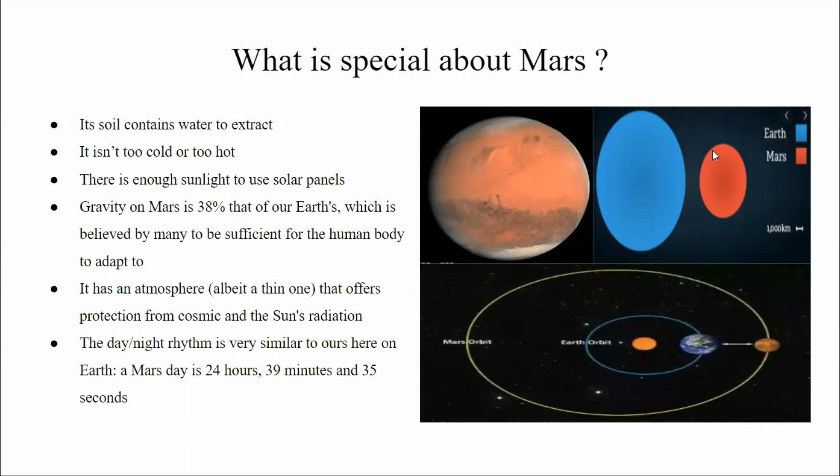Now let's see what we will need for colonization, not only on Mars but on any other planet, or colonization in general. Ask yourself what things you need daily to continue your life. You need basic utilities, you need food, you need communication. Mars is an interplanetary colonization, so you need interplanetary transport. You need transport on Mars like rovers or something else. The problem that comes here is all of this requires power.

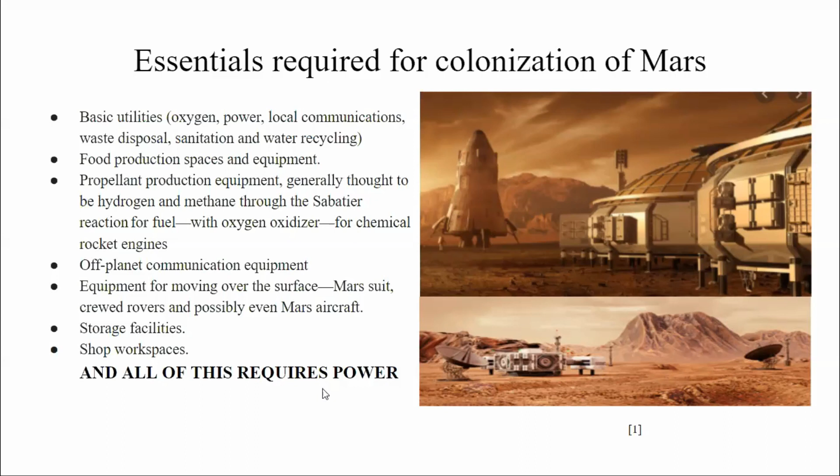If we want to colonize Mars so that it can back up all of our needs, for power generation on Mars we are proposing a supercritical Brayton cycle that will be operating on supercritical carbon dioxide as the operating fluid. Now, why a supercritical Brayton cycle and not any other normal cycle like the Rankine cycle or air Brayton cycle? The thing is, the sizes of these cycles have been very huge.

The Rankine cycle and the supercritical Brayton cycle are both designed for the same amount of energy generated. So you see, for 300 megawatts of power, you need about a 20 meter span of steam turbine, whereas the same power requires just a 1 meter span of supercritical carbon dioxide turbine. Moreover, the efficiency of supercritical carbon dioxide, as you can see, surpasses 40%. That is the highest achievable efficiency of any thermodynamic cycle till now.

Moreover, the system gets compact because the density of supercritical fluids is higher than that of gases. So it makes the machinery compact. Now let's see why we are going to adopt the supercritical Brayton cycle on Mars. The key here is the operating atmosphere, consisting of about 95% carbon dioxide. You can see here we have carbon dioxide as our operating fluid, not any other gas.

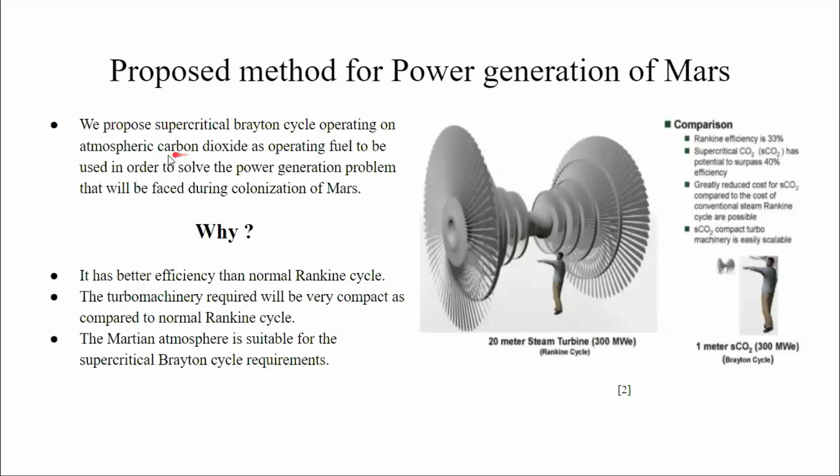We can just inhale the atmospheric carbon dioxide from Mars, compress it to its supercritical form using a compressor, and after that use it for expansion in a turbine; in between, we can apply heat using different methods. In our study, we took a nuclear reactor for heat exchanger applications. The only problem with the Martian atmosphere is it is much thinner compared to Earth's atmosphere. On a normal day, the pressure on Earth is 1 bar and on Mars is 0.006 bar. So there is a huge difference between the pressures.

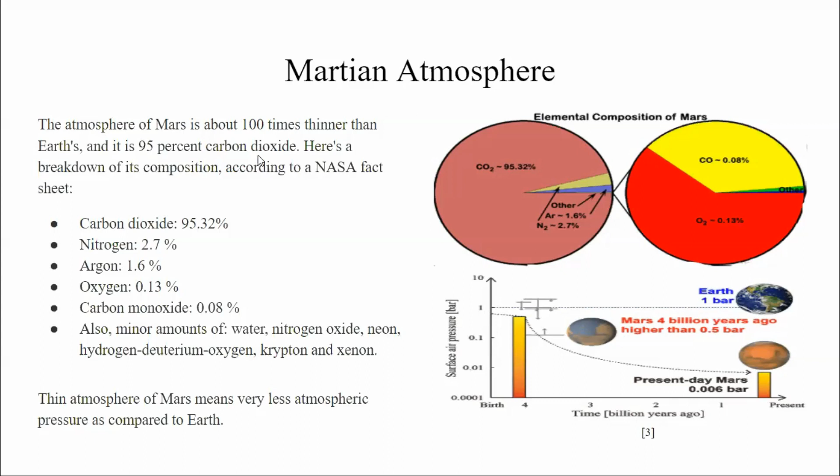So what are our objectives? So far, I think it is clear that we are going to make a power generation cycle on Mars to make it habitable. We are going to use atmospheric carbon dioxide, and we are applying the principle of the supercritical Brayton cycle attached to a nuclear fission reactor which will provide enough heat. In simple terms, we are going to design a power plant in accordance with the Martian atmosphere.

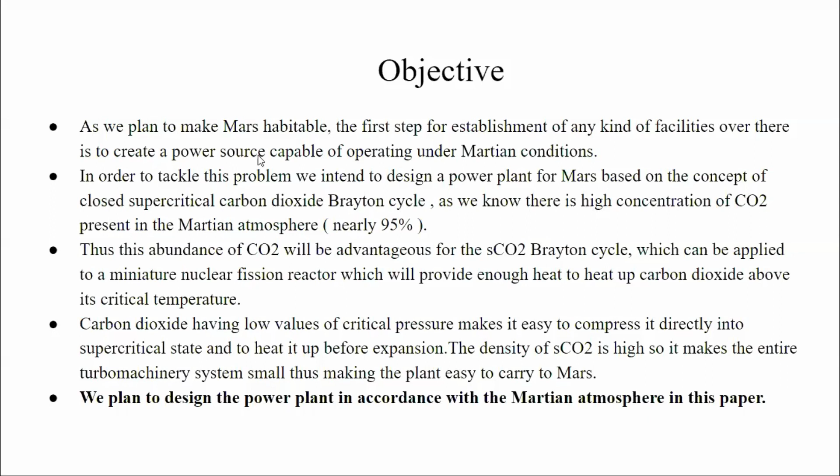So, what is the concept behind the idea, behind the supercritical Brayton cycle? The basic concept is to do in situ power generation. You must have heard these days that SpaceX is planning to generate methane on Mars from carbon dioxide. That type of generation is called in situ generation. That means you are using the resources of that planet itself without carrying anything extra from here. So we are conceptualizing that we will use atmospheric CO2 on Mars for our operation.

See, this is the temperature versus specific entropy graph of the supercritical carbon dioxide Brayton cycle, and this below is the vapor dome of supercritical carbon dioxide. So you see that carbon dioxide critical pressure is about 7.7 megapascal. That's very low as compared to other fluids that we have; the supercritical pressure and temperature of carbon dioxide is very, very low.

So what we plan to do, we plan to inhale atmospheric carbon dioxide from our compressor. Then we plan to compress it to about 7.7 megapascals. And after that, we plan to add heat from our nuclear fission reactor. And after that, we plan to expand it slowly on our turbine. And there will be a shaft that will be rotating and that will be connected to our generator. And in that way, our generator will finally convert the mechanical energy to electrical energy.

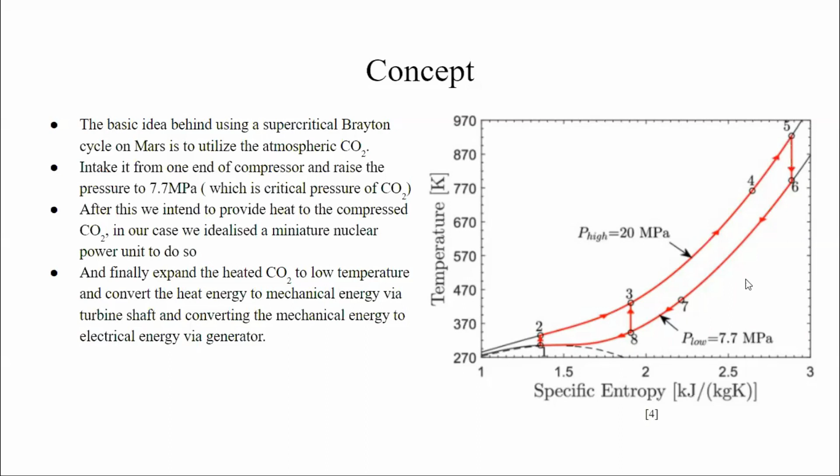The heat energy of the reactor is converted to mechanical energy by the turbine, and finally the mechanical energy of the turbine is converted to electrical energy with the help of a generator. So it sounds easy, right? But what are the challenges that we are going to face?

See, the first challenge is it's an interplanetary task, so we need to install all this system on Mars. Second, we need a nuclear reactor small and capable enough that it could be transported to Mars without any hazards, of course. The next and the biggest problem is this one. We have to increase atmospheric carbon dioxide pressure from 6 millibars to 7.7 megapascals. Now, how are we going to do that?

For initiating our calculation process, we have to idealize something, we have to assume some things. So what have we assumed here? We have assumed that we are capable of transporting large bulks of machinery that will be required for this task to Mars. Then we have idealized that we have successfully made a miniature nuclear reactor, and we are able to manufacture compressors of high enough compression ratios to pressurize carbon dioxide to its critical pressure.

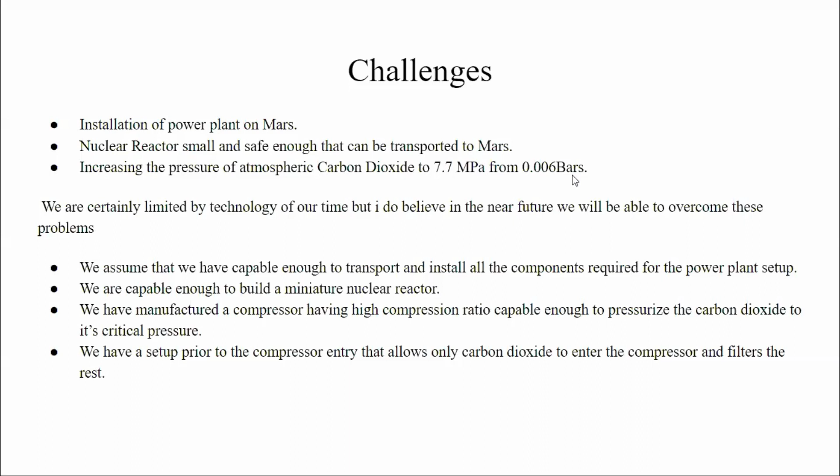Now let's see what supercritical carbon dioxide actually is. So any known element has three phases: solid, liquid, and gas. This is the curve of pressure and temperature. Above this, the element is in its solid phase. Between these, the element is in liquid phase, and below this, the element is in gaseous phase. This is the triple point of any element, at which its vapor, liquid, and solid forms coexist together.

Now, what is a supercritical phase of any element? When the temperature and pressure exceed the critical temperature and critical pressure. What's critical temperature? Critical temperature is the temperature after which, no matter how high pressure you apply, the phase of that element won't change. It won't liquefy anymore. So the supercritical zone is a mixture of gaseous phase and liquid phase. It has properties of both gases as well as liquids.

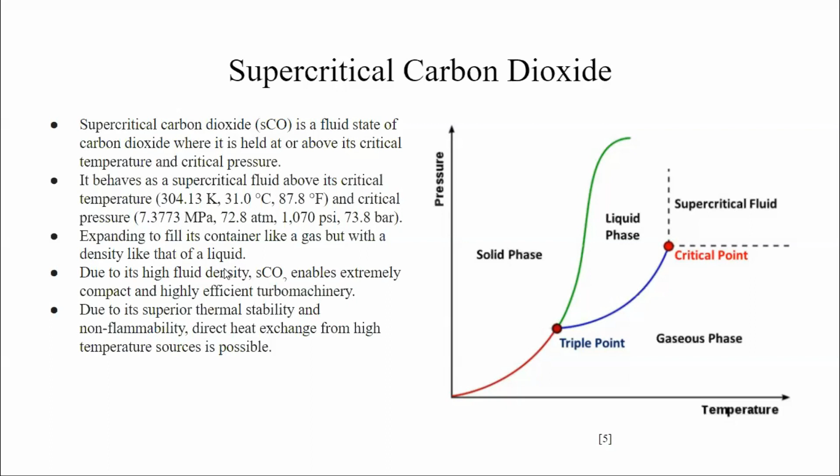So you see here that carbon dioxide reaches supercritical form very quickly. Right? We have to input very little work as compared to other fluids to make it reach its supercritical phase. So at supercritical phase, carbon dioxide has the following properties. It has low viscosity like a gas, high diffusivity like a gas, no surface tension like a gas, high density like a liquid. You see, so these are properties of both gases and liquids at its supercritical phase.

That means our working fluid is in vapor phase as well as liquid phase, having high densities and high solvent powers and almost no surface tension. So that means we have to apply very little work. That means our turbomachinery will get more and more compact in size.

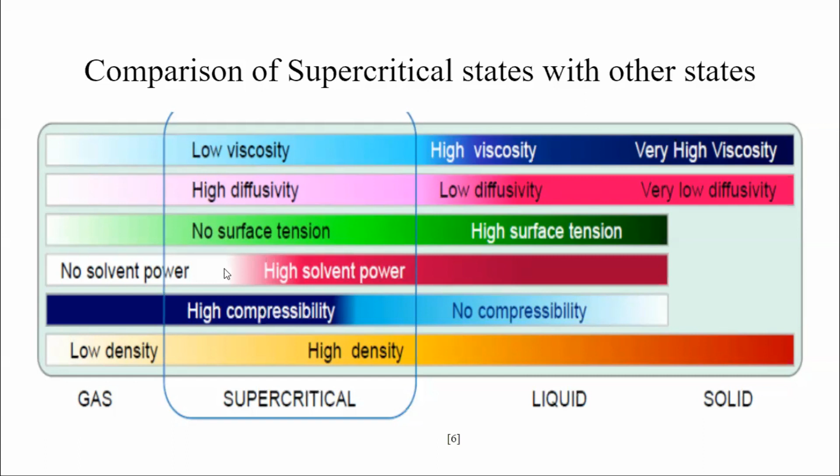And then this heated up gaseous mixture is applied to the turbine where it expands. And when it expands, it rotates the turbine, and that work is our work output. The catch here is the turbine and compressor are connected with the same shaft. So some amount of work is going to be used for operation of the compressor. So you see, the efficiency of any thermodynamic cycle is work output minus work input upon Q in. So the less work consumed by the compressor, the higher the efficiency.

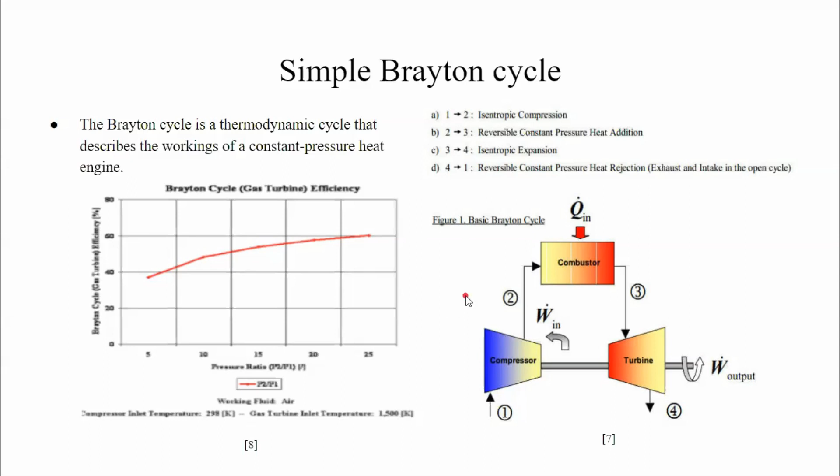Now, if you are using more than one compressor, you usually apply an intercooler. An intercooler is nothing but a heat exchanger. So see what happens in real cases: when your gas is entering the compressor, the compressor compresses it, and the density and temperature both rise. So if you supply this high temperature gas directly to the combustion chamber, it won't absorb the amount of heat that it could have absorbed when it was cool. So we are wasting a lot of heat in the heat exchanger when we supply the hot gas directly to it. So we apply an intercooler here.

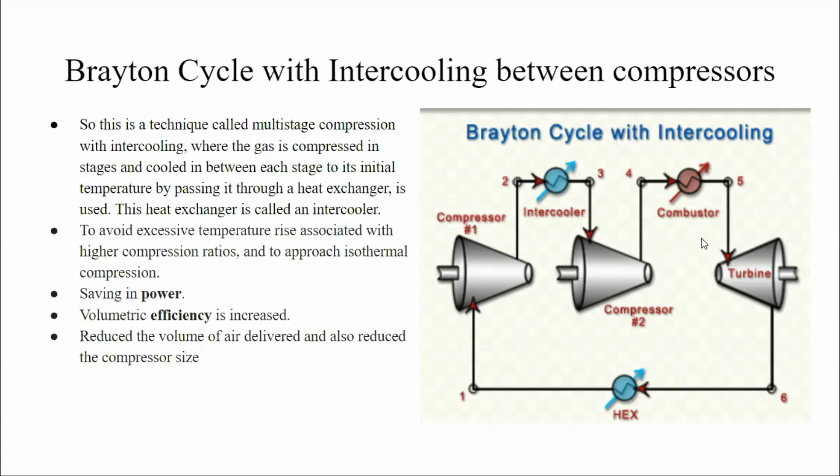So what does this intercooler do? It cools down the exhaust of every compressor in order to keep the heat absorbing capacity high. The main motive behind this is increasing the volumetric efficiency and saving power. Now see what we are going to use. We are going to use a Brayton cycle with recompression and recooling. We have already explained what recooling is. So what is recompression?

In recompression, we know the ambient pressure of Mars is 0.61 kilopascals, and what we do in the recompression cycle is that the turbine won't expand the gas to the ambient pressure. It will expand it to a point higher than ambient pressure, and that exhaust will be fed into another compressor. This will reduce the compressor work, and as discussed earlier, reduction in compressor work increases efficiency. So this is the whole layout of our plant.

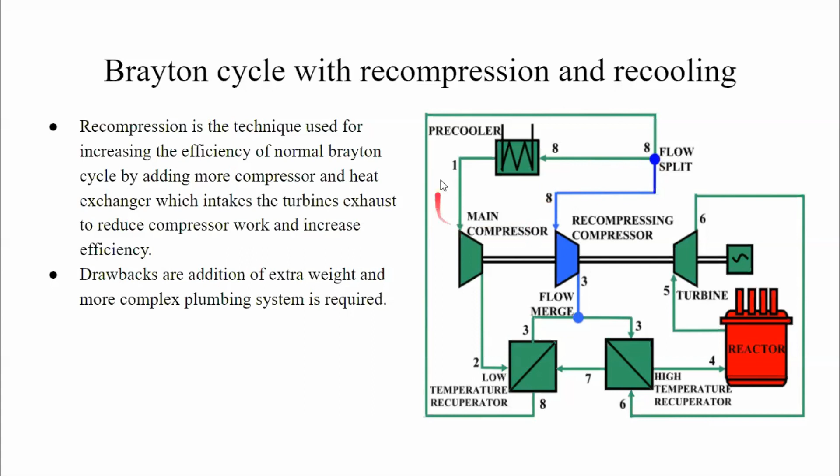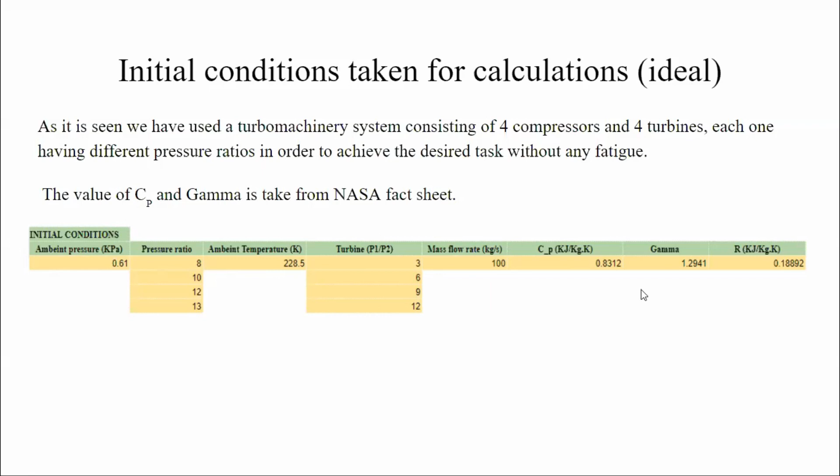Now, these are the initial conditions that we took for calculations. You can see we have four compressors and four turbines having different pressure ratios and expansion ratios. The values of Cp, gamma, R, and ambient temperature are taken from the NASA fact sheet. After putting in these initial values and doing state point calculations, we are taking a heat rise of 250 Kelvin after the heat exchanger. That means our heat exchanger has raised the temperature of the inlet gas by 250 degrees. Now there is a catch here: we can't go above 1800 Kelvin, and that's because of the material barriers that we have.

As I was talking about the recompression cycle before, here the pressure input is 0.61 kilopascal from compressor 1, that's the ambient pressure of Mars. But turbine 4 expanded to 3.91 kilopascal. That's not the ambient pressure, that's much higher compared to the ambient pressure of Mars. But when this is fed again to a compressor, the work done by the compressor is reduced, and that reduction gives us a slightly higher efficiency.

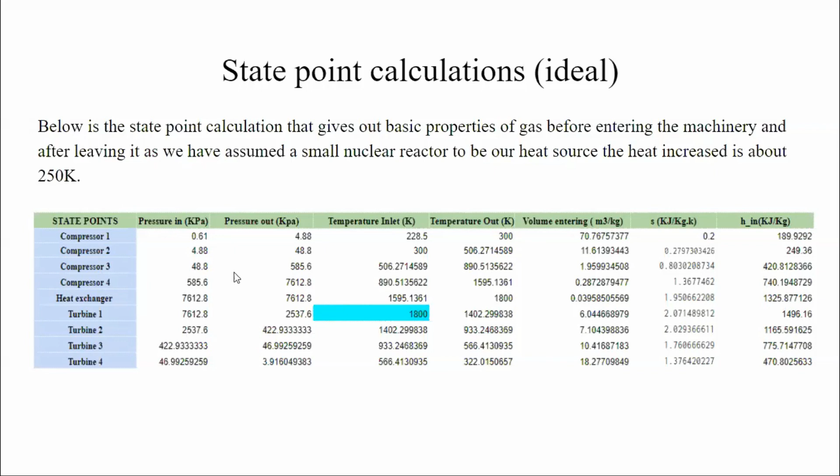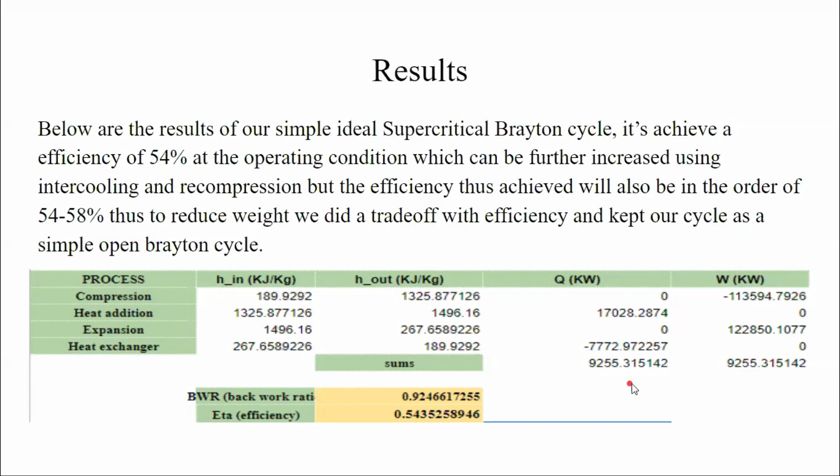Now see the results after taking these state points and initial values. You can see the total work done in the compressor is negative. That's because we are providing it work. And the work done in expansion, meaning the work done by the turbine, is positive, because the turbine is actually the working device. It is driving the compressor as well as the generator. If we apply a heat of 17 megawatts, we have an efficiency of about 54%, and that is very high compared to any other thermodynamic cycle.

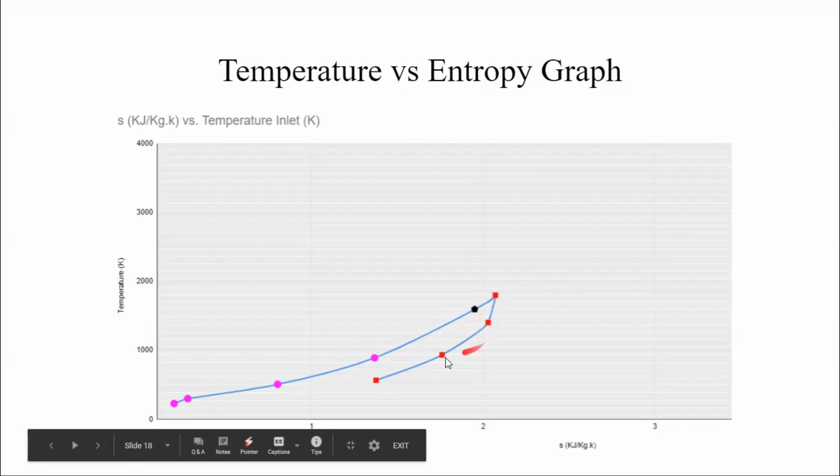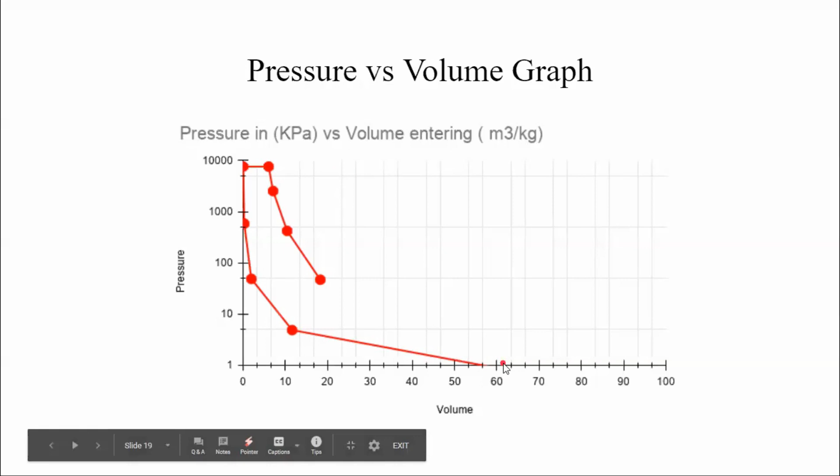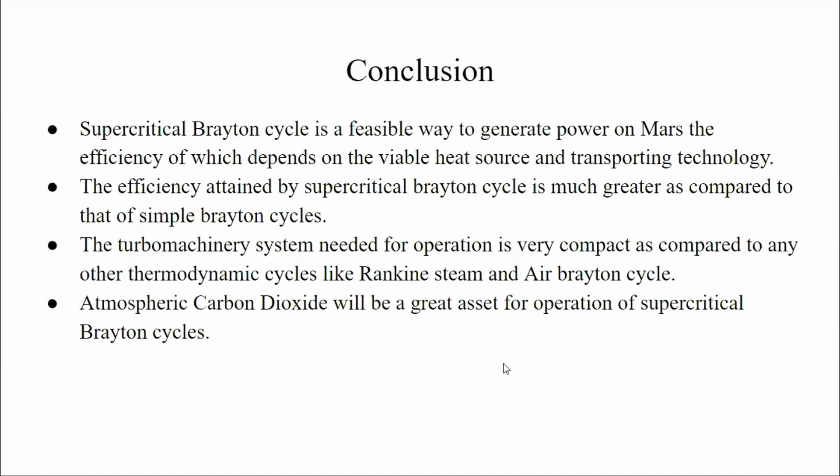Now, what are the conclusions? The supercritical Brayton cycle is only limited by present-day technology for transportation and making a small suitable nuclear reactor. Once done, it could be the best way to supply power to Martian households, camps, or whatever it is. And here is the future work we intend. We are going to study different configurations of Brayton cycles, and after that, we plan to develop a miniature supercritical Brayton cycle at our university for experimental studies.